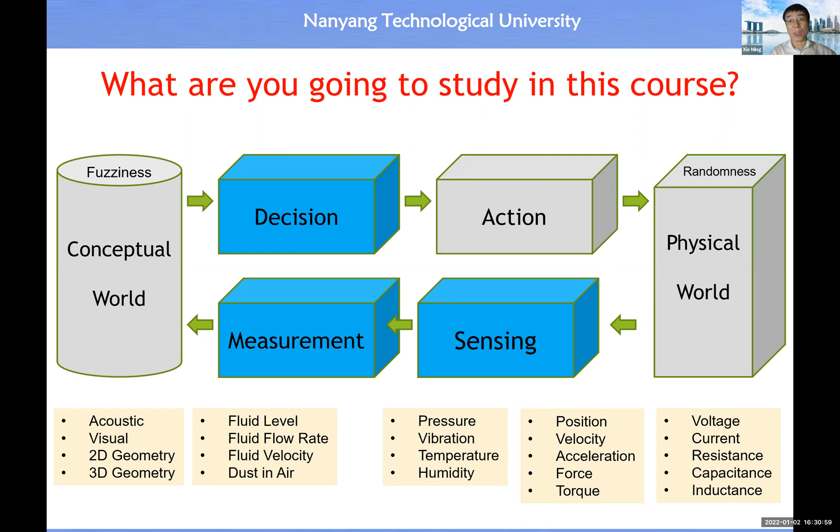In addition, this course covers the basic details about the physical world and the conceptual world. The course also covers the basic knowledge for you to apply in order to cope with randomness in the physical world, and also the basic knowledge to deal with fuzziness in the conceptual world.

Then the fourth common question that you may have in mind is about how to apply knowledge learned from this course. This slide basically shows you the general guideline for the design of a sensor or sensing system. The design of a sensor and the sensing system involves 2 steps.

Step number 1 is to design the sensing element which will transform the value of the physical quantity under measurement into readable value. The second step is to calibrate the sensing and the measurement system so that the output from the sensor is exactly equal to the input value of the physical quantity under measurement.

In addition, after calibration, you should be able to assign the unit of measurement to the output, which will be exactly equal to the unit of measurement at the input of your measurement and sensing system. For the first step, you may face 2 situations.

The first situation corresponds to the case in which the use of a front-end sensing element should be good enough for you to achieve the transformation from the value of physical quantity into readable value. And in most cases, you may face the second situation in which you have to make use of a front-end sensing element plus back-end sensing element in order to transform the value of a physical quantity under measurement into readable value.

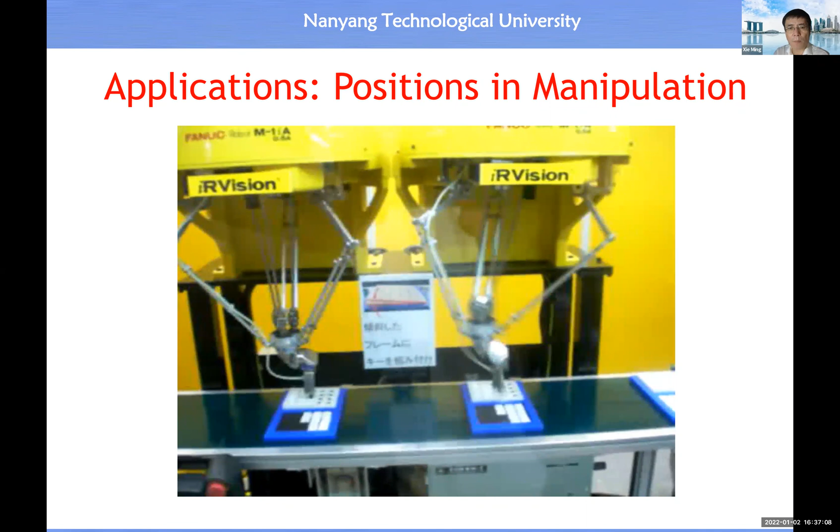And this video shows you the industrial application in the production line in which a robot will undertake autonomous pick and place. You will see for such behavior, knowledge about position is critical. And in this video, you will see again that the knowledge about position is extremely critical to implement such autonomous behavior, which could be performed by humanoid robots.

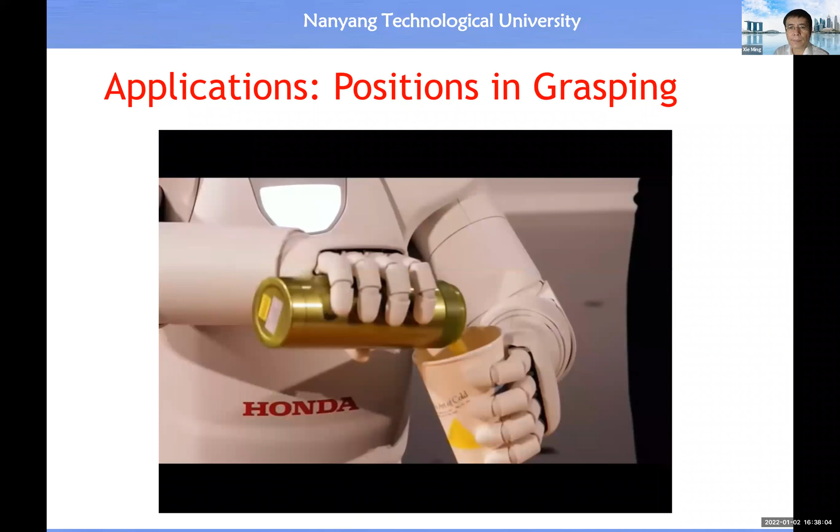In the physical world, all entities are subject to spatial constraints and time constraints. So therefore, we want to know the position and also the time associated with all the physical entities in the physical world. So space and time are the background knowledge about the existence of any entity in the physical world.

In order to tell the value of a spatial property, we need to have a reference. In other words, in order to tell the position, we must provide the reference. For example, distance means what? Distance means a relative position with respect to a reference point. So we can talk about distance between 2 points, or distance of 1 point with respect to another point. So therefore, we need to have a reference.

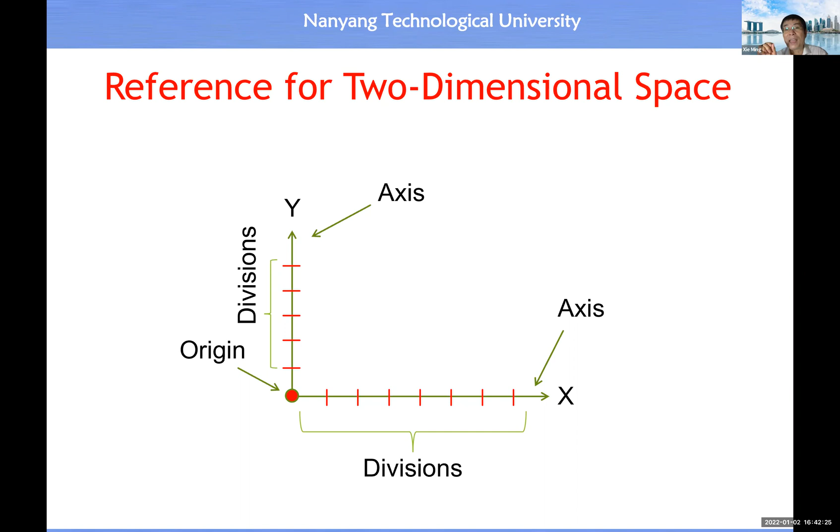If we want to study the position or motion in a planar surface or two-dimensional space, then we need two references in two different directions, one in the horizontal direction, another in the vertical direction. Each reference corresponds to one axis. Then we can make the origins of these two axes superimposed together, just to simplify the notation.

Then in the case of study in three-dimensional space, we need three references, and each reference will have one axis, so we will have three axes. Then we can make the three origins of these three axes superimposed at a common point. So this is why we have a common origin. However, the directions of these three axes are orthogonal. Then each axis has its division and scale.

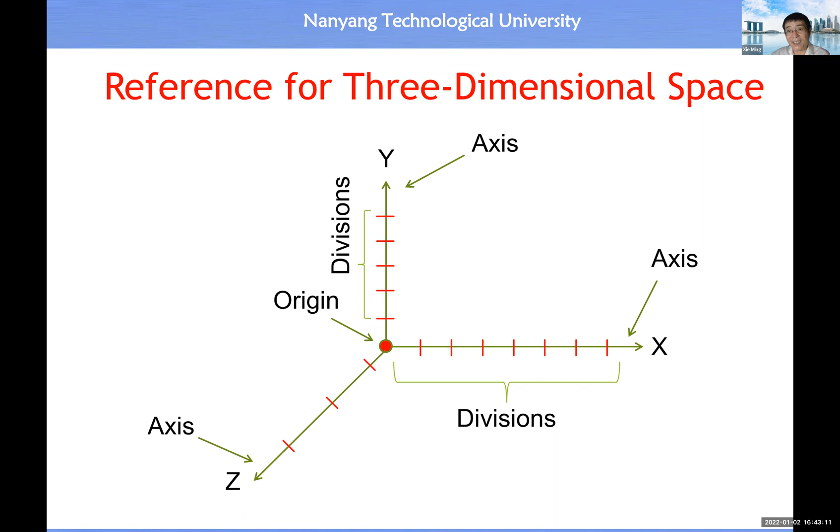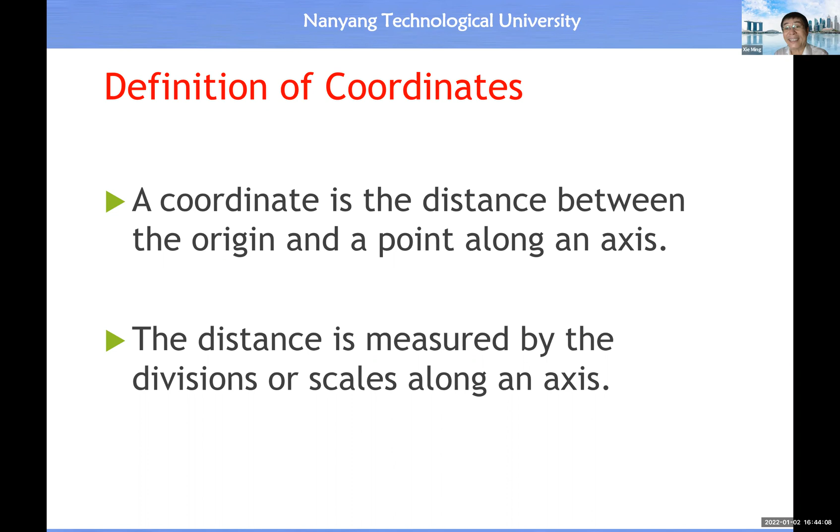Then with each reference, or each axis, we can tell the position. The position basically means the distance between the origin and the point of the object on the reference. This distance is called a coordinate. In technical terms, a coordinate is the distance between the origin and the point along an axis. This point could be the projection of any physical entity onto the axis of a reference. The distance has a unit of measurement, indicated by the unit of the scale or division. So this is the detail about the reference for space and reference for time.

Then in two-dimensional space, we have two axes and their origins are superimposed together. In this case, we must have two distances: distance to origin along the horizontal axis and distance to origin along the vertical axis. These two distances are called the x coordinate and the y coordinate. For example, the distance from A to origin along the x-axis is 1, 2, 3. Distance from A to origin along the y-axis is 1, 2. So the coordinate of point A is (3, 2) meter.

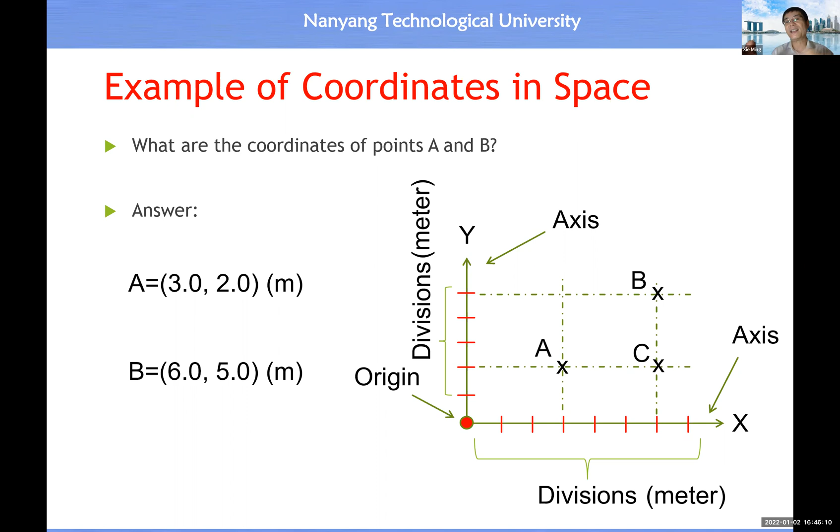Then what should be the coordinate for point B? Distance from B to origin along the x-axis is 1, 2, 3, 4, 5, 6. Distance from origin to point B along the vertical axis is 1, 2, 3, 4, 5. Therefore, the coordinate of point B is (6, 5) meter. So this is a way for us to describe the detail of a location. If we follow this background knowledge, everyone will understand our description of a position.

Besides the XYZ coordinate, we may also use the polar coordinate. The polar coordinate is suitable for describing the output from radar or laser rangefinder, because the laser rangefinder just scans in the horizontal plane. At every angular position, you measure the distance from the sensor to the target point. So the output should be the angular position plus the distance. If we put these two pieces of information together, we call them a polar coordinate.

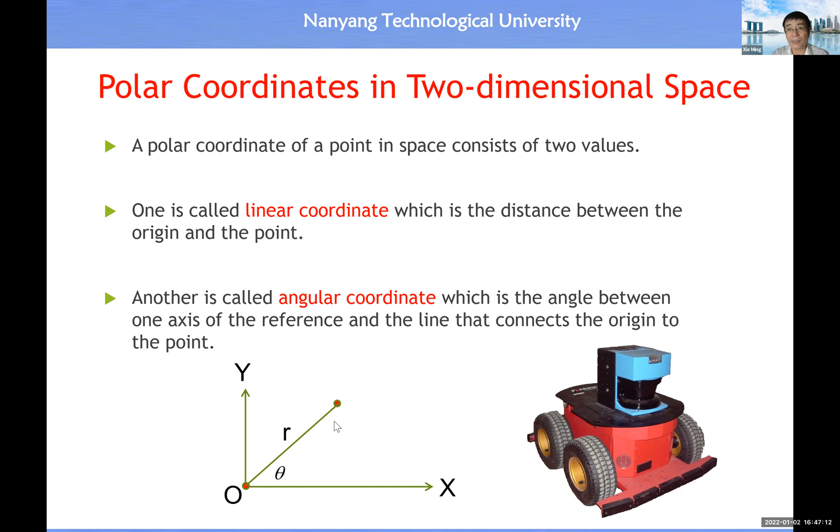So it's quite straightforward. A polar coordinate consists of a distance from the origin to the point of measurement, plus the angular position of this vector from the origin to the point of measurement. So, r theta. Mathematically, we can undertake conversion between the polar coordinate and the XY coordinate.

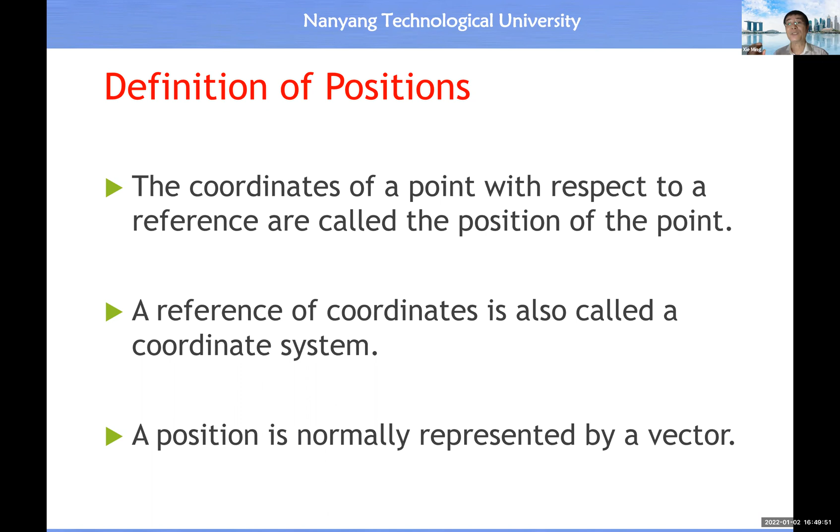For example, in three-dimensional space we have a global coordinate system. Then for each rigid body inside the physical world, we could define a position vector. There is background knowledge here: this is a convention in the study of mechanical systems. We normally assign a local coordinate system to each rigid body. Therefore, the position of the rigid body is equal to the position vector of the origin of the local coordinate system with respect to the global coordinate system.

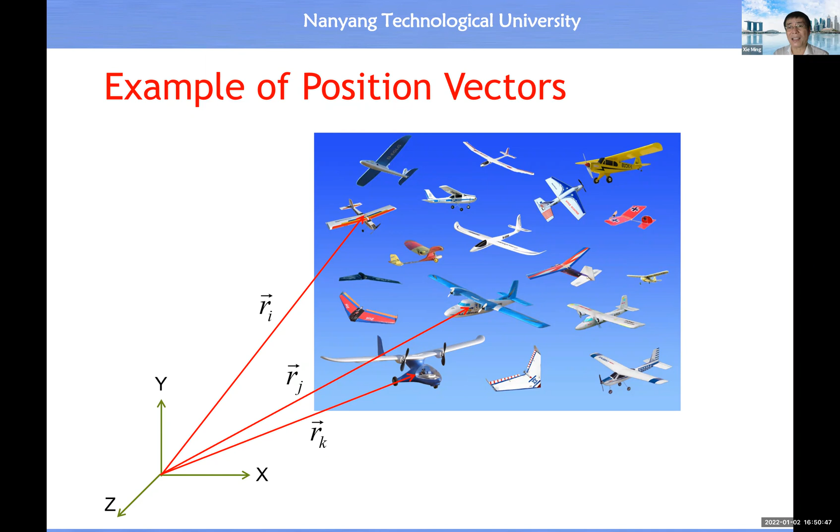Because we assign a local coordinate system to each rigid body, the origin of the local coordinate system represents the position of that rigid body. So this is a convention used in the study of mechanical systems. That's about the detail of position.

We can talk about position in the time axis, and position in the space axis. In three-dimensional space, normally we have three axes, and the position could be represented by a vector. These are the details about the position of an entity in the physical world.

Then the next question should be how to indirectly measure the position of a physical entity, or how to directly measure the position of a physical entity in the physical world. So we look at the scenario of indirect measurement. Indirect measurement means computation using knowledge about the related physical quantity. For whatever reason, if we are able to measure the related physical quantity, then how do we use this knowledge to compute position? This corresponds to the scenario of indirect measurement.

Based on our knowledge of physics and mathematics, we can formulate four observations. In physics, position can be calculated from knowledge of velocity, and position can also be calculated from knowledge of acceleration. In year one physics, we studied this relationship among position, velocity, and acceleration. In mathematics, we know we should be able to determine the position of a point in a two-dimensional space if we know the distance from this point to a few reference points, and similarly in three-dimensional space, we can determine position from relative distances to reference points. So these are the two scenarios for us to use to calculate position. Now I'm going to show you the detail for each of these four scenarios.

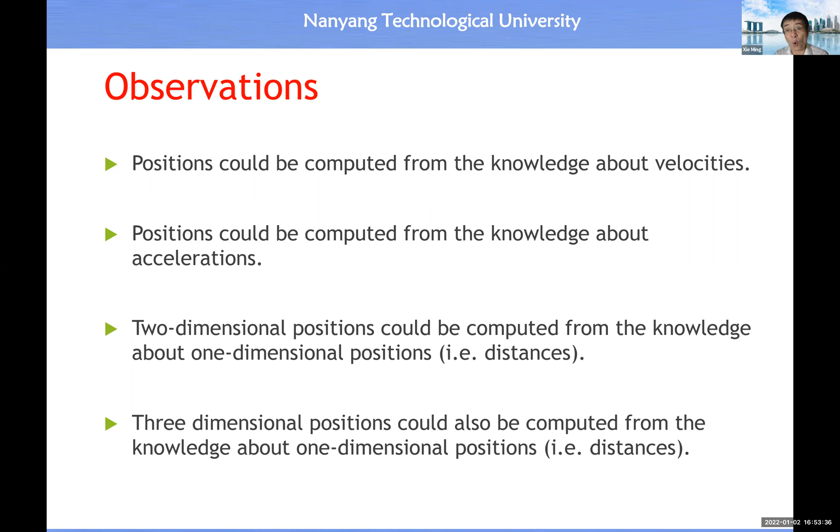Let's consider this special case of velocity. For example, we know the velocity of a moving object or moving signal is constant. How do we leverage this knowledge to calculate position information? In the first case, if an object moves along the x-axis with a constant velocity, what should be the time function for us to use to calculate its position at any point in time? The answer is straightforward: x(t) equals initial position plus the increment of position due to constant velocity, so it's v times t. This is a very simple equation. Once we know v, we can calculate position at any point in time.

Now we'll pay attention to this particular situation: we know the velocity of a signal. For example, light - the speed of light is constant, and electromagnetic waves are light, so the speed of electromagnetic wave is constant. How do we leverage this knowledge? The answer is to leverage this property to come out with a solution, so that we can indirectly compute or measure the position of a moving object. Later on I'll show you the detail. This is the first scenario, which corresponds to the case in which velocity is constant. We can explore this special case to design a different type of product, making use of this property of a signal traveling at constant velocity.

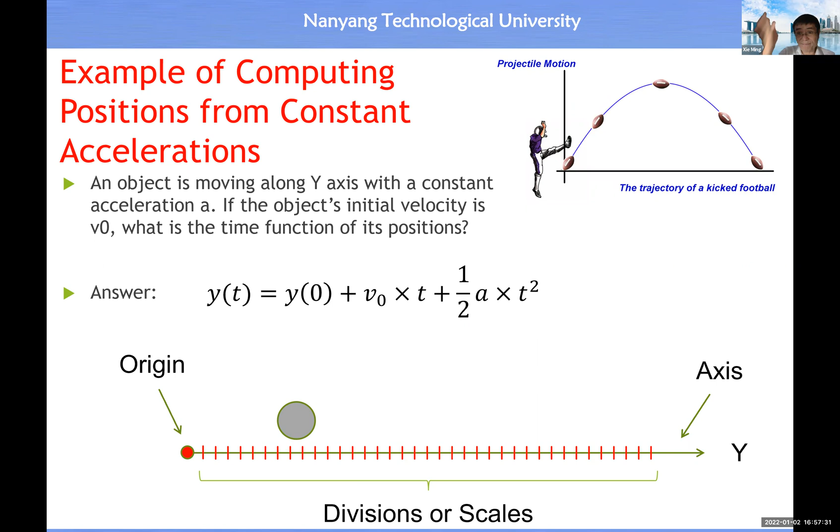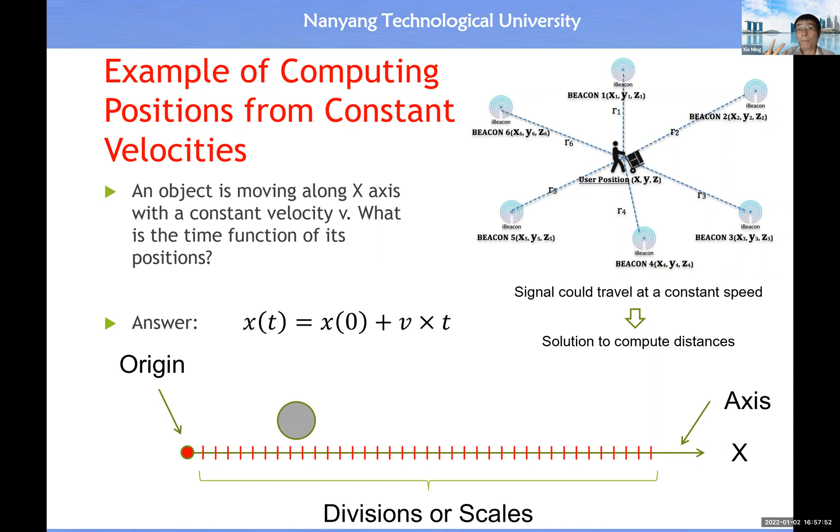Now to this question: how do we explore the use of a signal's constant velocity to come up with a product or system for the measurement, or indirect measurement, of position? The answer should be similar to this question: how to determine position from distance? Because we're able to determine distance from the constant velocity of a signal. Later on I'll show you how to determine distance from a signal's constant velocity. First, let's look at the answer to this question: how to determine position from distance.

In case we only know one distance from a physical entity to a reference point, then in this case we only know that this physical entity should be at any location on the surface of a sphere centered at the reference point.

The reference point basically means an emitter of a time signal. So let's say we have an emitter of a time signal, then the object or any physical entity will carry a receiver of a time signal. Once it receives this signal, we calculate the sending time and the receiving time, then delta t times speed of light gives us this distance.

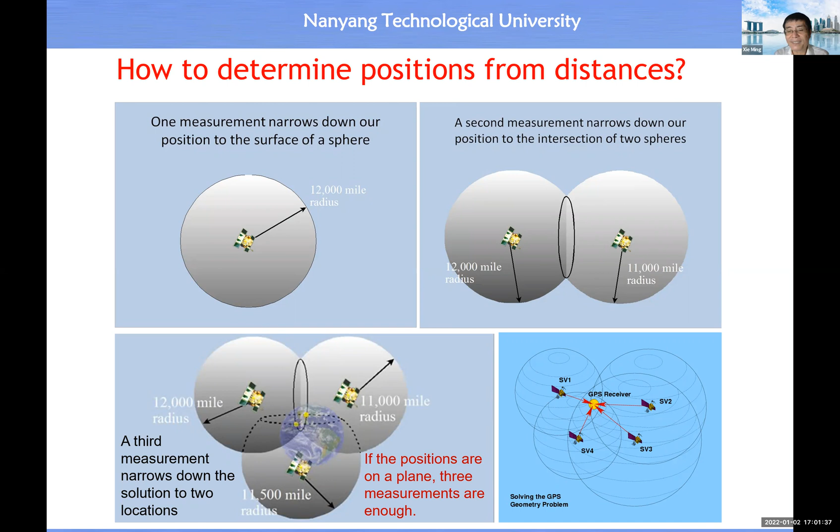Then the next question you may ask is how to determine distance. The answer is to use a time signal emitter and receiver. For example, we have a receiver which will be carried by a robot, a smart vehicle, a person, whatever, or by any target. And we have an emitter at a known position, meaning the position of this emitter is known in advance.

We let the emitter send the time information to the receiver, because this electromagnetic wave can be encoded with a 0101 binary number. So inside the binary number, we can write in the XYZ coordinate value plus sending time. Here we assume all the emitters and receivers have the same clock, a very, very precise clock, which we call an atomic clock. So very, very precise.

Once the receiver receives the signal, you can detect what the receiving time is. Then delta t should be equal to receiving time minus sending time. Once we know the time difference, this time difference times the speed of light gives us the distance between one pair of receiver and emitter.

In this scenario, we have 3 pairs of receiver and emitter, because this receiver could form 3 pairs with these 3 emitters. So let's answer this question of how to determine distance between 2 locations.

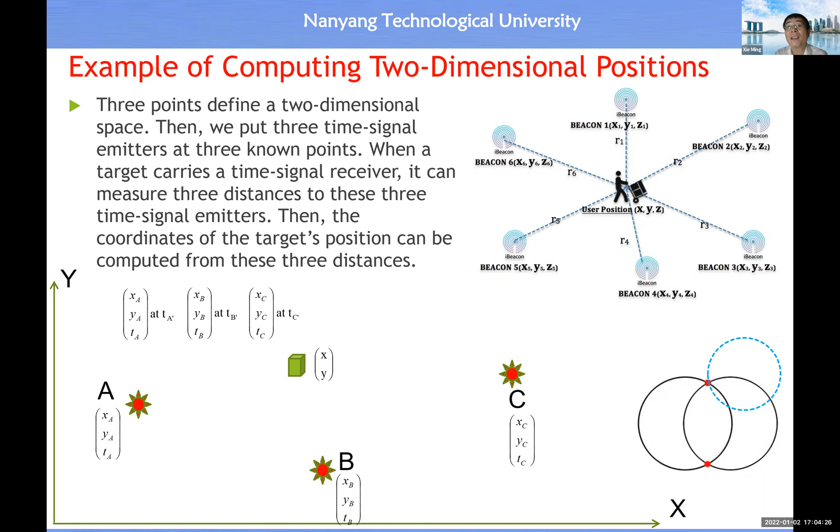Then the receiver will receive this information plus the receiving time, because inside the receiver there's also an atomic clock, and they are running at the same time. Therefore, we will know what the receiving time is, and then we will know what the distance is. With this distance, it should be good enough for us to come up with the solution for the calculation of a position. Now here we have the detail of the equation.

Okay, for example, we should be able to write down the equation of a circle centered at the point A, the equation of a circle centered at the point B, the equation of a circle centered at the point C, and the radius for the circle at the point A should be equal to velocity times delta t, and the radius of the circle at the point B should be equal to velocity times delta t.

All right. So in this case, delta t is equal to tB prime minus tB. So this one is the receiving time. This is the sending time. Right. Similarly, for the circle centered at the point C, we could write down this equation. Right. Then we expand these three equations.

Then we let the first equation be minus the second equation. In this way, we will cancel out the x squared, y squared. Okay, and then we obtain this equation. Similarly, we let the first equation be minus the third equation. In this way, we cancel out the x squared, y squared. Then we have this second equation here.

Now we can put these two equations together into a matrix equation. Then we compute the inverse of the matrix. Then in this way, we will obtain the solution for us to calculate x, y, right? And here, A is a coefficient matrix with all the coefficients in front of x and y. B is a coefficient vector, okay? So B contains this value and this value, all right? So this is a quite straightforward solution, all right?

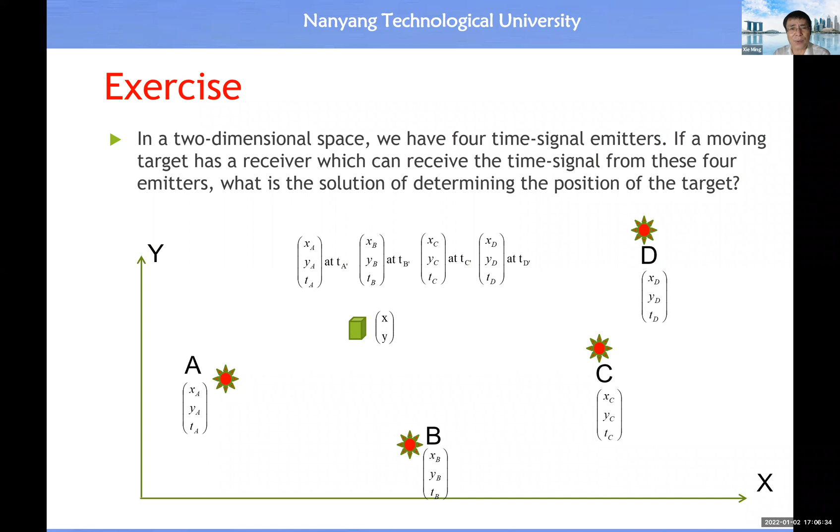Then this exercise is for you to think about or to do at home. The question is, what happens if we have more than 3 emitters? Then what should be the solution? All right, so you try to come up with the solution for this scenario. All right, and this video is showing you an implementation of this solution by a company.

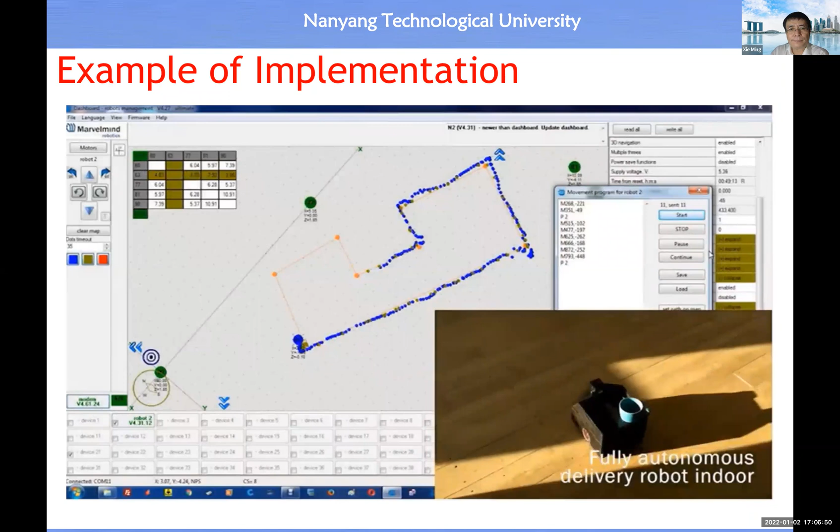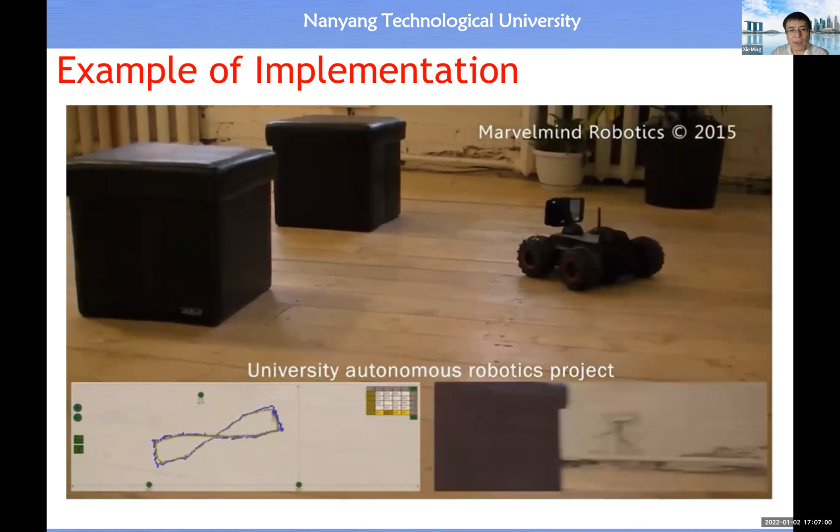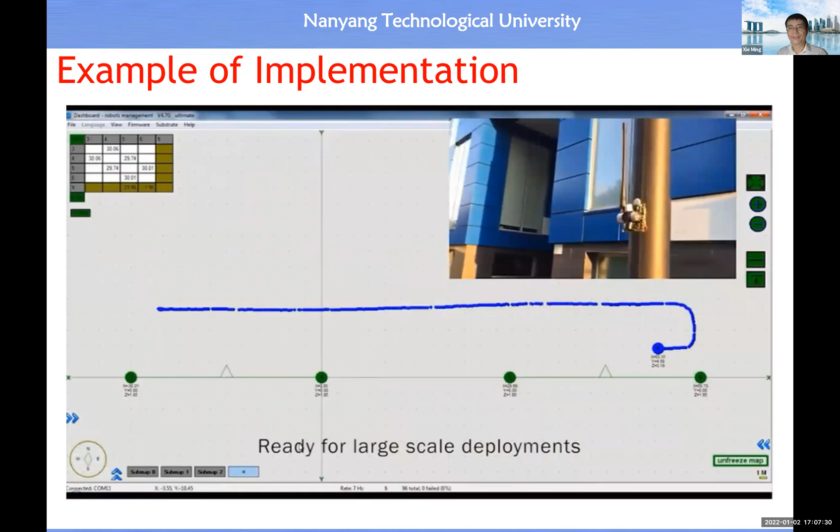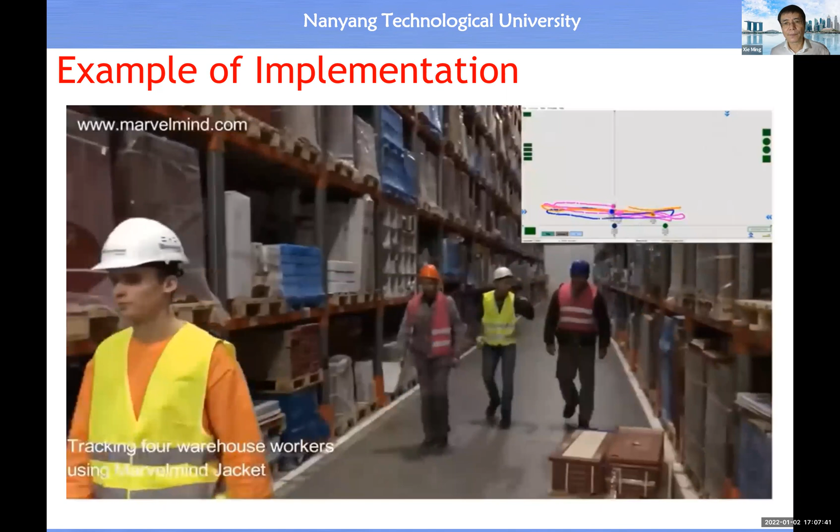You see, we can compute the location in a 2D space, okay, in real time. And in this case, we only consider the XY coordinate of the geometry. Okay, we ignore the height of the geometry. So you see the accuracy is quite accurate, right? In this case, also we are in a 3-dimensional space, but we only care about the XY coordinate.

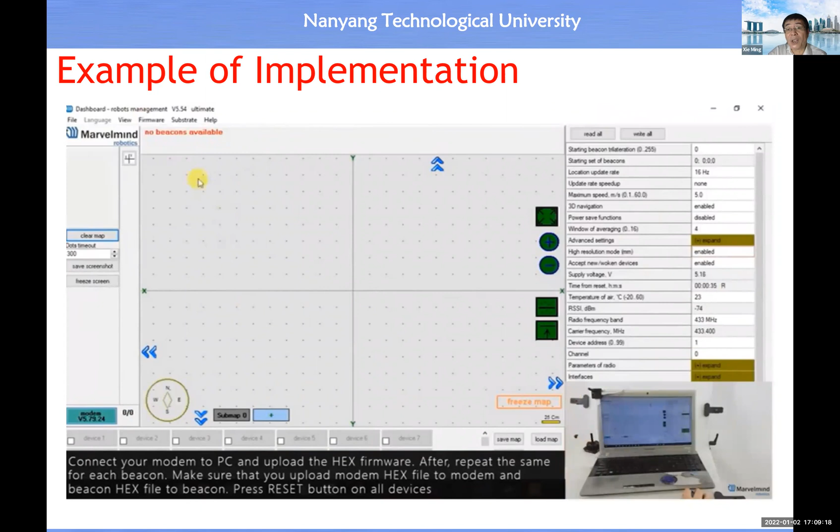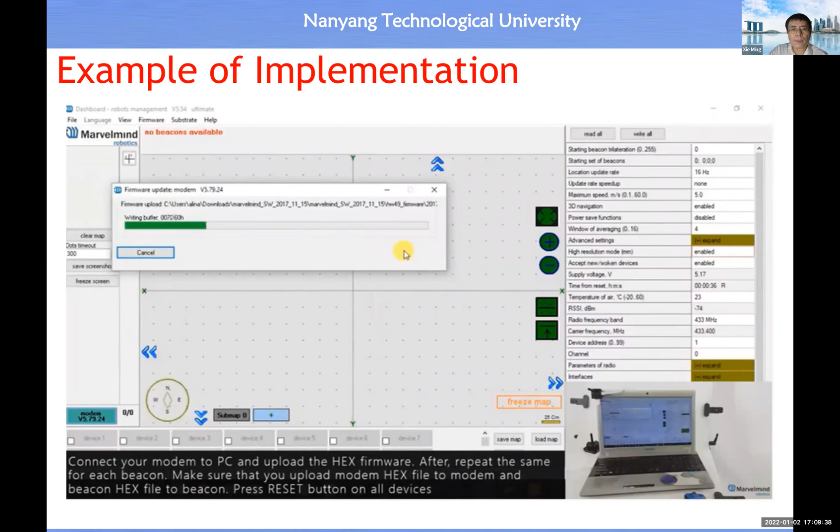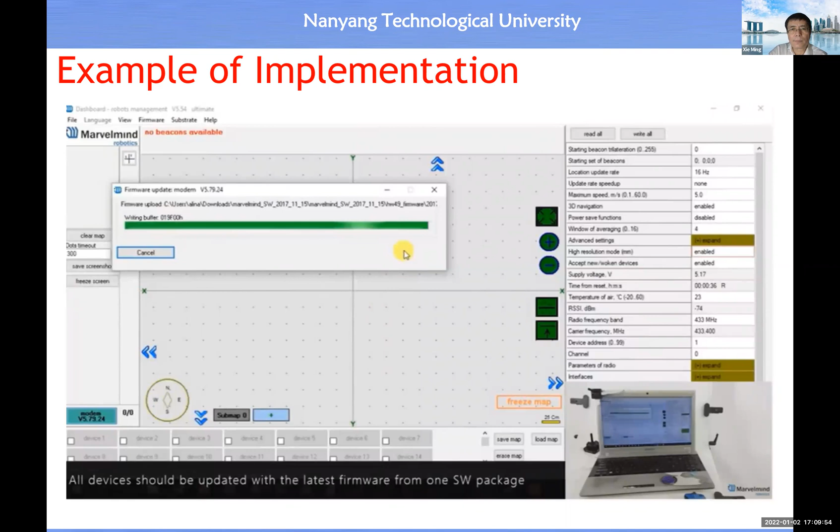So you will see the procedure about how to install the software, how to do the setup. Then you see, okay, they place the emitter at the fixed location, or at the location in which the XY coordinates are known in advance.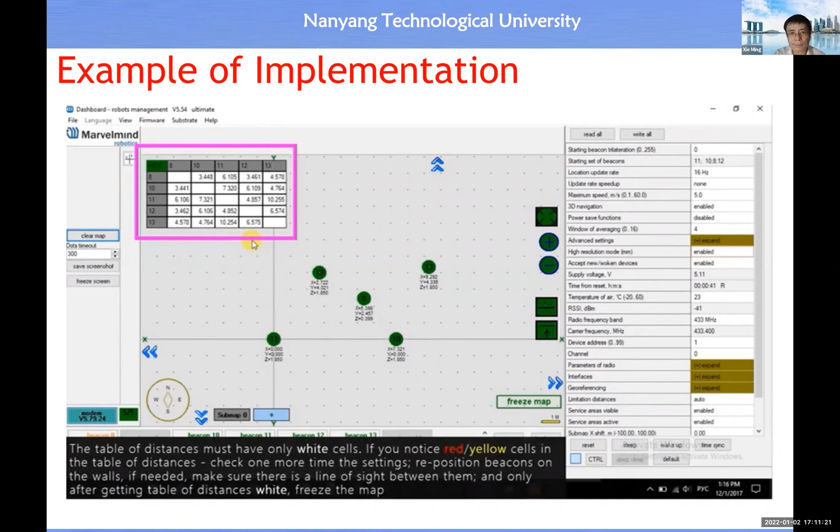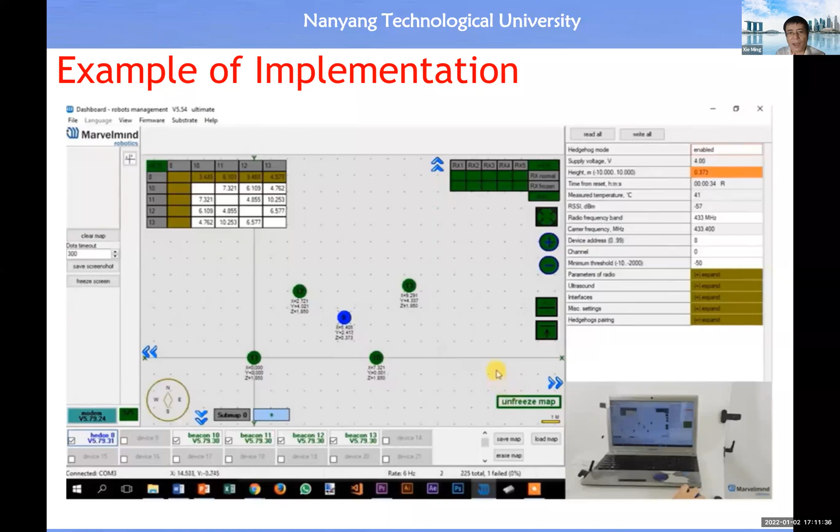Since the XY coordinates of these four emitters are known in advance, therefore we can visualize their location, all right? The fifth one should be the receiver, okay, on the target, a moving target, right? The blue color one should be the receiver, okay, which is placed on the moving target. So this is the one, right?

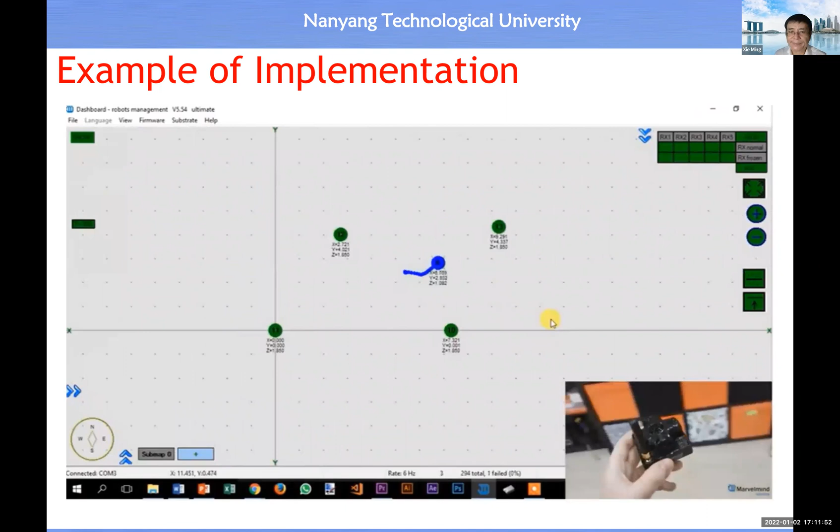So you see, when we move this receiver, the XY coordinate of this receiver could be calculated in real time, very, very precisely. All right, so you see this principle which has been implemented, okay, with a real product.

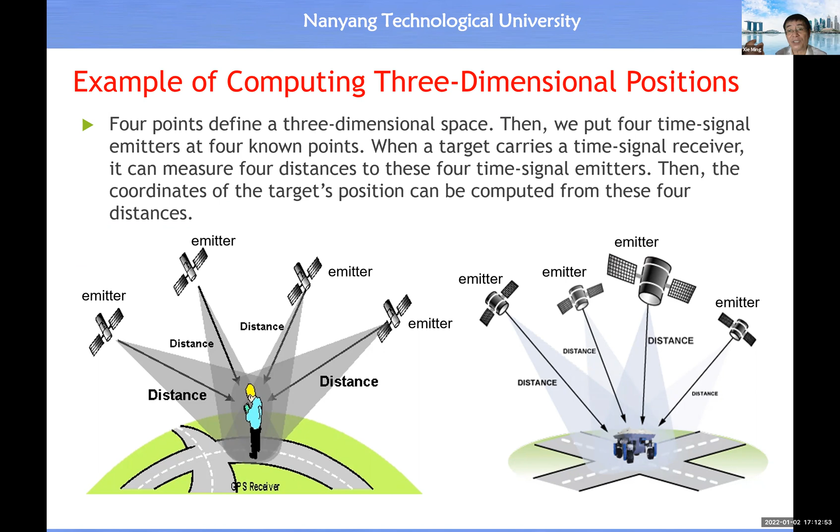All right, so now we move on to consider the situation in which we would like to know the XYZ coordinate instead of the XY coordinate. All right, then in this case, instead of having 3 emitters, we need to have 4 emitters. All right, so this is a scenario corresponding to the GPS inside your smartphone or GPS inside your smart vehicle, etc. Right? Then what should be the equation behind the calculation of making use of GPS in order to determine the XYZ coordinate of a moving target?

All right. So then the equations should come from the 4 equations of 4 spheres, because we have 4 emitters. Okay, so emitter 1, emitter 2, emitter 3, emitter 4. Each emitter has their own precise XYZ coordinate, and each emitter, okay, will send out the time signal with the sending time. Then the receiver will receive this signal. Then the receiver should be able to calculate the delta t. Then delta t times the speed of light should be the distance from the receiver to this emitter.

Therefore, centered at this emitter, we should be able to write down the equation of a sphere. Then this is the equation of the first sphere, equation of the second sphere, equation of the third sphere, equation of the fourth sphere, right?

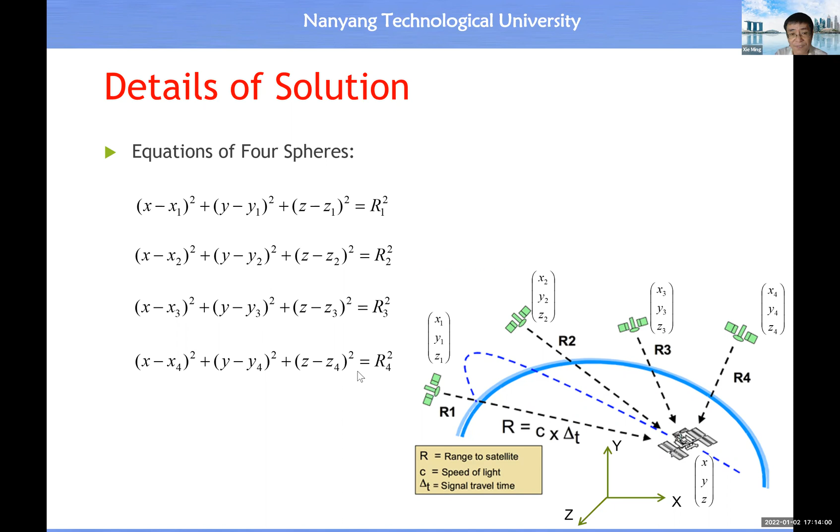Then from these 4 equations of a sphere, we let the first equation be minus the second equation. Then we should be able to remove the terms, okay, of x squared, y squared, z squared. Then we have this linear equation for x, y, z. Then we let the first equation be minus the third equation. Then we have the second equation.

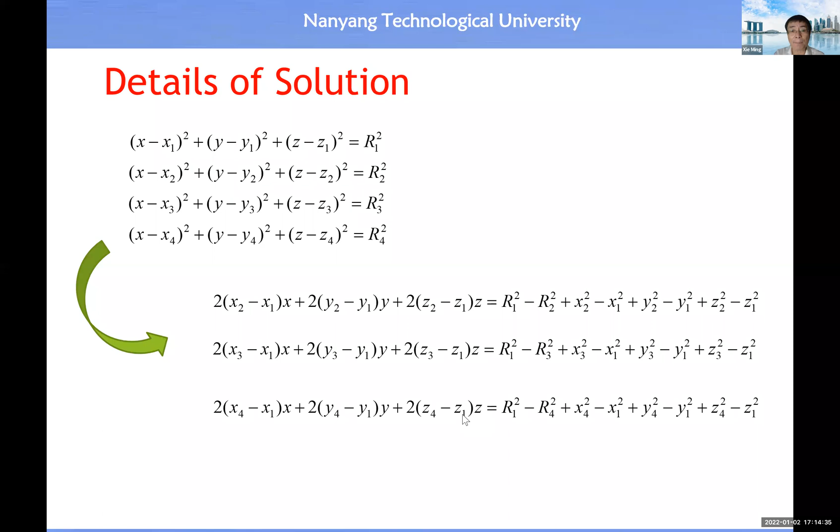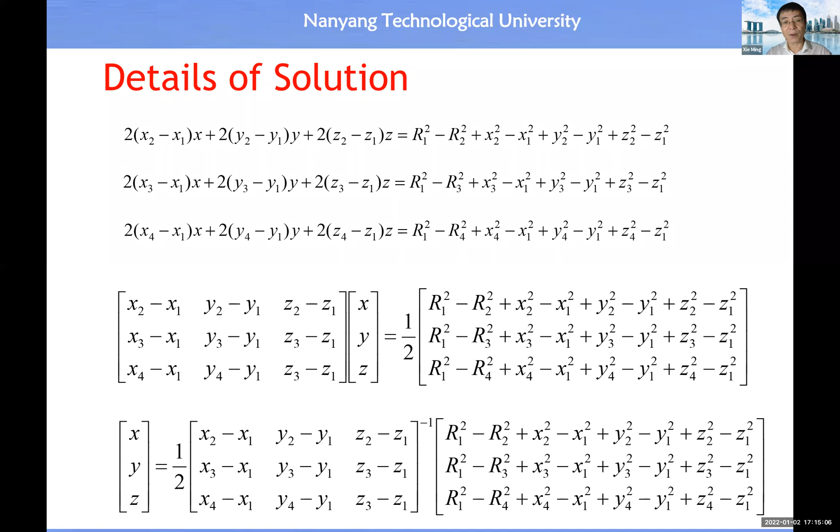And this is a square matrix. Then we can compute the inverse of this square matrix. Then immediately we have a formula for us to calculate x, y, z. All right, so it's quite straightforward. And this is an exercise for you to do at home.

Okay, what happens if, let's say, we have a receiver which could receive signals from more than 4 emitters? Normally it's true, inside our smart handphone, our GPS receiver could receive 12 signals, etc. Then in this case, what should be the solution for us to calculate X, Y, Z?

So that's about the basics of indirectly determining the position in the 1-dimensional space, 2-dimensional space, and the 3-dimensional space. But our focus here is on direct measurement of the position. Then you may want to know what should be the physical principle for us to follow in order to guide the design of our own measurement and sensing system for position.

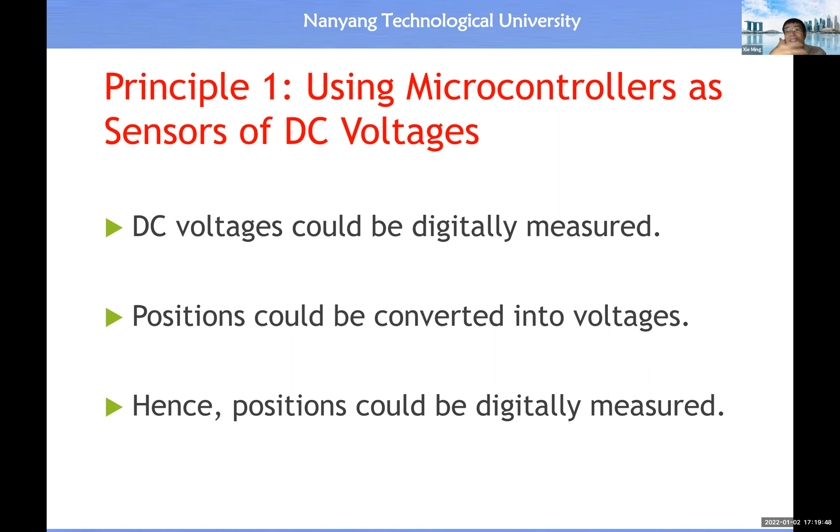So now I'm going to show you the example which will make use of design principle 1 and design principle 2. By following the example, you should be able to come out with your own solution. So principle number 1 is to consider the microcontroller as a sensor of DC voltage. Then in this case, you just need to know how to transform position into voltage. If you are able to do that, then you have a solution already.

Then the design solution should be this one, because inside the microcontroller, we have modules such as a voltage synthesizer, analog comparator, digital counter, digital display. And the working principle you know: we predict the digital value for voltage, use the predicted value to synthesize DC voltage, and use the synthesized DC voltage to do comparison with the input voltage.

When the values match, then we will stop the counting. Then the actual value inside the counter should be the digital value which corresponds to the analog input here. Then the whole problem becomes how to transform the value of a physical quantity under measurement into DC voltage. In this case, how to do position-to-voltage conversion.

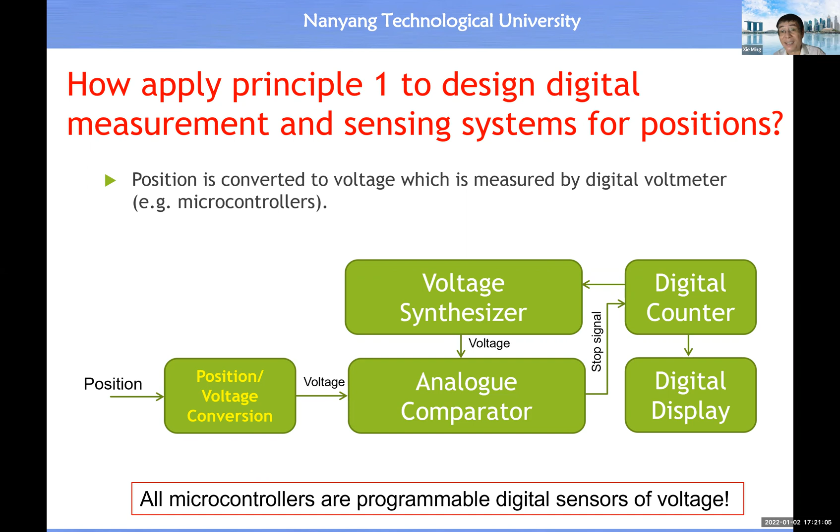If you have an answer, then you have an answer to this question of how to apply principle 1 to design a digital measurement and sensing system for position. So actually, there are many ways for us to do the conversion from position to DC voltage. For example, this is also a popular solution. We call this sensor an infrared distance sensor.

So we have an infrared emitter, LED, then we have a light detector, which is called a phototransistor or photodiode. The light will propagate in the space, hit the target, then reflect back. The amount of energy received by the phototransistor will be reflected by the voltage as output here, because the light will transmit out, bounce back, and hit the phototransistor. Then this one will produce a response in terms of DC voltage as output, and this is proportional to the amount of energy received by the gate pin here.

So if more energy is received here, you will have more current which will flow through here. Then the voltage will drop. And then the input-output relationship will look like this. This is the output voltage, and this is the distance to the reflective object. You have an infrared transmitter and the photodiode to detect the reflected energy. When the distance increases, the amount of energy will reduce.

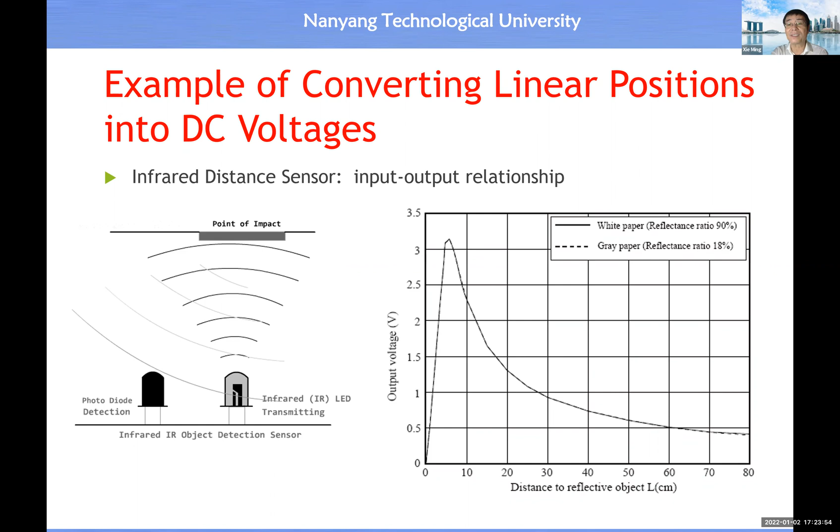By doing calibration, we can easily ignore this measurement range. Or you can implement a decision rule to know whether the value corresponds to sensing in this short range or in this long range. Because in this way, you can also detect the presence of an object which is very, very close to the sensor. So it's up to you. This is the typical response from an infrared sensor.

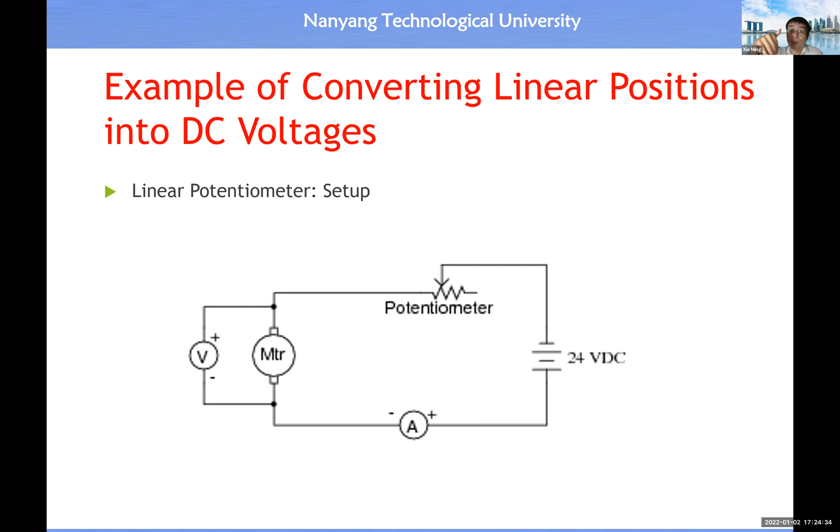And the second solution is to use a variable resistor. A variable resistor has a wiper. We use the wiper to couple with linear position. For example, if an object undergoes linear motion, you can couple this linear position with the linear position of the wiper. In this case, we can convert variation of position to variation of resistance. Then we apply a voltage to the R circuit, and variation of resistance will become variation of DC voltage.

The equation is here. This one is coupled to the linear motion of a target object. This motion will produce a variable resistance at the output. This variable resistance will produce a corresponding output voltage, because the current is equal to V input divided by the total resistance. Then this current times this variable resistance is equal to the output voltage.

And this ratio is actually equal to the ratio between this distance and the total length of the resistor. This is the total length of the resistor, and this is the variable length of the resistor. So you have this relationship. This is for linear motion.

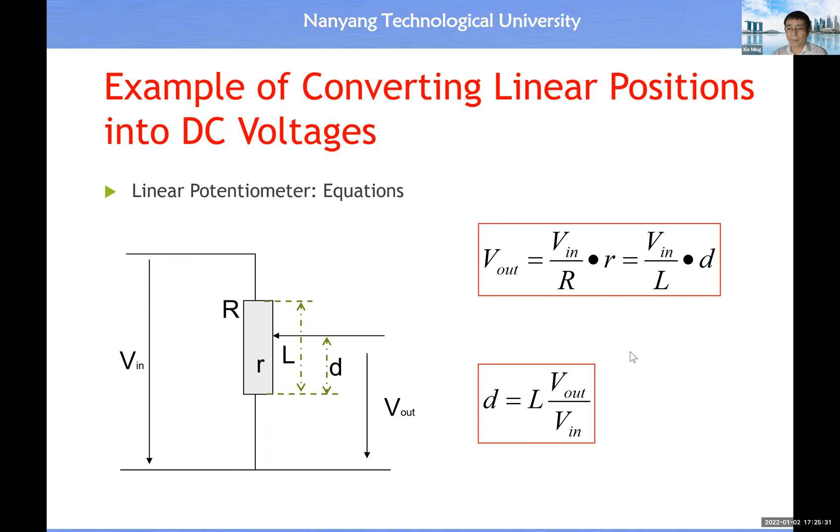Then how about rotary motion? We also have a rotary potentiometer, and the typical application is shown here. For example, when you design a human-sized robotic hand, there are many degrees of freedom inside. Therefore, you cannot afford to use a big sensor to measure position. Then we may have this small-sized potentiometer.

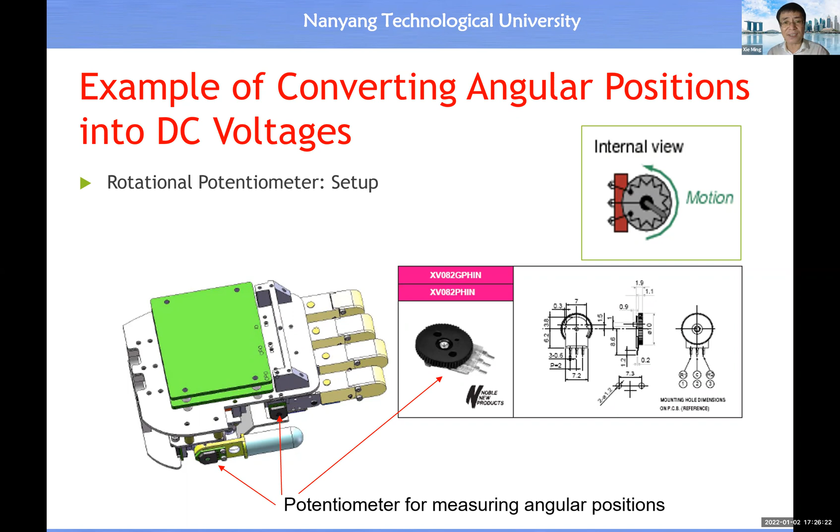Inside here, you will see there's a wiper. The wiper will undergo rotary motion. You have two pins as an input. Let's say this is a common ground, this is the input voltage, and this will be the output voltage. So this is a very simple device. The mathematics will look like this.

In this case, similarly, the current which flows inside the resistor is equal to input voltage divided by the total resistance. Then output should be equal to the current times the variable resistance r. That means the ratio between this one and this one should be equal to the ratio between the angular position of the wiper divided by the total angular position of this circular resistor.

By default, we assume this circular resistor covers 360 degrees, then we use 2 pi. If this one is smaller than 2 pi, then you use another value. But anyway, it does not matter because we have a calibration. Here we see an error because this is a systematic error. It's always fixed. So it does not matter because through the calibration, we can cover this error, or eliminate this error.

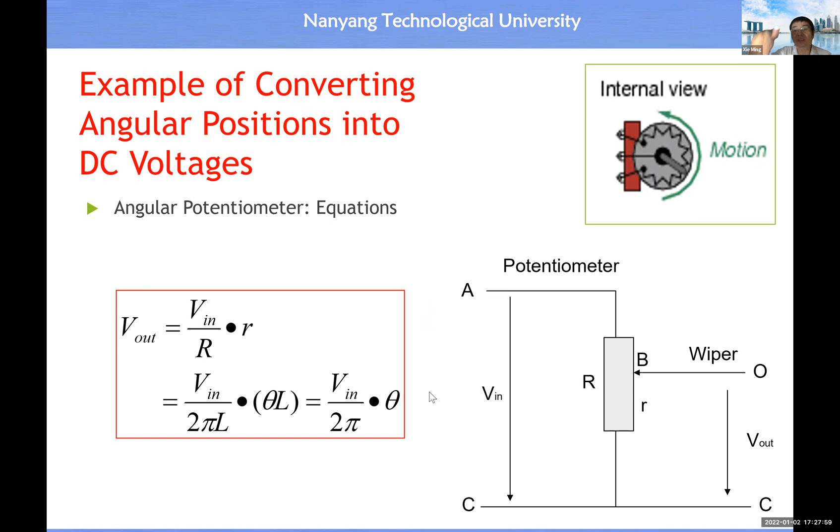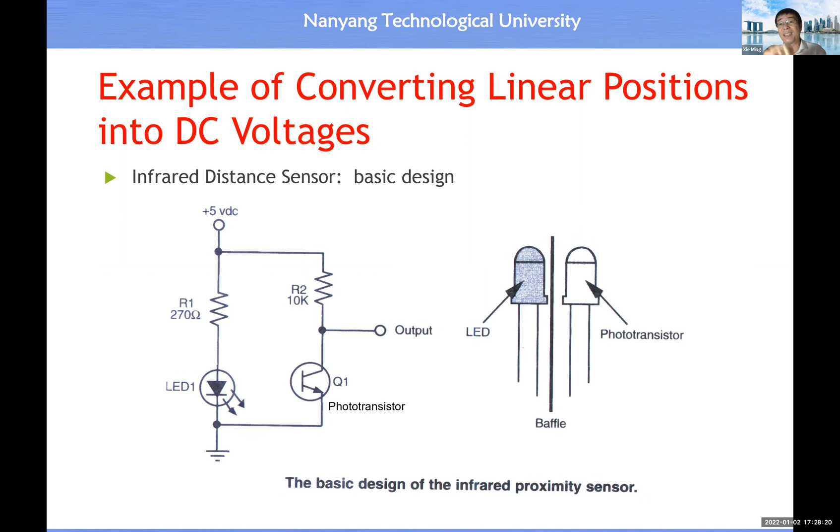So you can use this ideal value for the entire range of this circular resistor. So theta divided by 2 pi basically will give you the relative resistance as output. Then output voltage is a function of angular position of the wiper. So this is an equation for you to use. So by using principle 1, it's quite straightforward for you to come out with the solution for the module which will transform position into DC voltage.

Then how to apply the second principle? Let's say we want to use a microcontroller as a sensor of a digital signal. Then in this case, we need to convert position into a digital signal, either time series. Later on we'll show you an example. That means the position corresponds to the number of pulses, in series or parallel bit. So in this case, it corresponds to the spatial pulse.

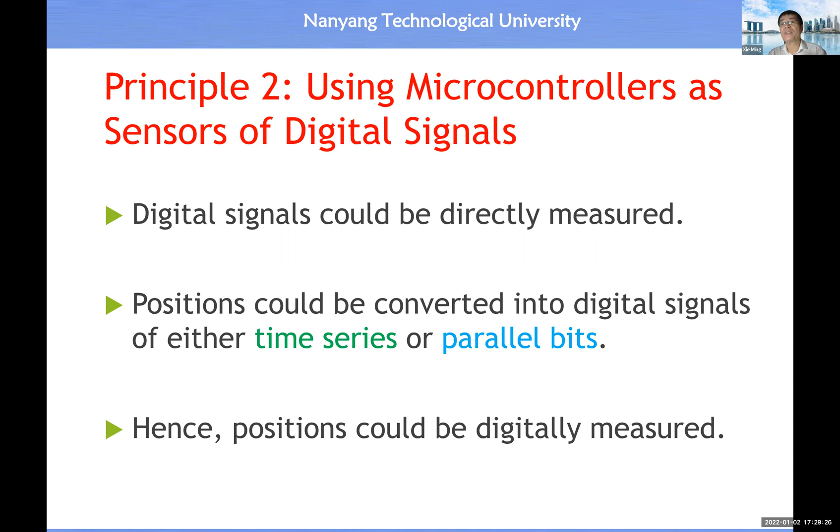That means B1, B2, B3, B4, Bn. So that is a spatial pulse. So this is a time series of pulses, and this is a spatial pulse. Anyway, these are digital signals. So in this case, we can leverage the use of a microcontroller to help us come out with the solution for the design of the measurement and sensing system for position. Then how to apply principle 2 to design a digital measurement and sensing system for position?

And inside the microcontroller, there are programmable timers. That means the frequency could be changed, and the counting value, like count up, count down, and the maximum counting value could be changed, could be set by the programmer. So it means the timer is programmable. And of course, we have a digital display device which could be attached to the microcontroller.

And here you will see the microcontroller could undertake serial counting, pulse by pulse, or parallel counting. That means if you have an 8-bit or 16-bit or 32-bit spatial pulse at the input, then in a single cycle the microcontroller should be able to read the value. So therefore, now our focus should be on the conversion of a position into digital pulses. If we have a solution to convert the value of a position into digital pulses, either time series pulses or parallel bits, it should be good enough.

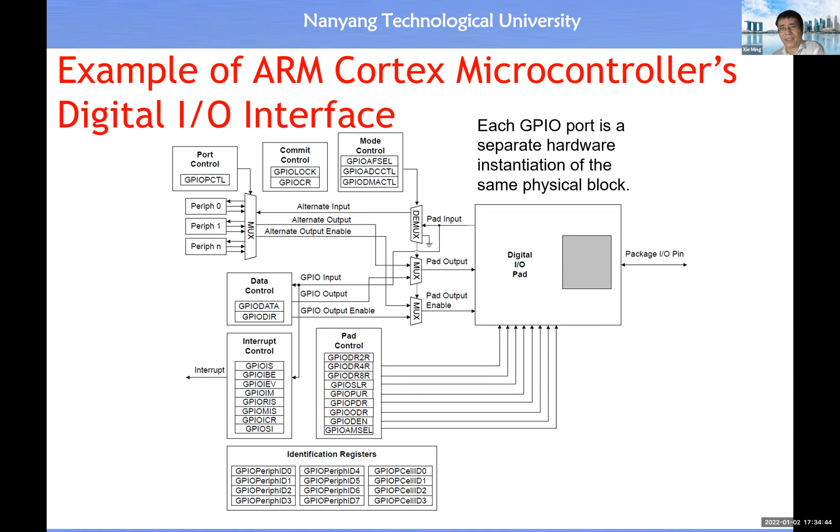So then you see you have a lot of controllers. You use the registers and you can control them, and eventually you can trigger the action by external signal, etc. So this basically helps you understand that the microcontroller is a very sophisticated device, a very, very powerful device.

Now we focus on this question of how to convert position into digital pulse. Do we have a solution? The answer is yes. For example, we use an ultrasonic waveform to do the measurement. We have an emitter, transmitter, and receiver. The transmitter transmits the ultrasonic waveform. When this waveform hits the target, it bounces back. Then the receiver will detect the echo of the ultrasonic waveform, therefore immediately you know.

So we need to detect the starting time of the transmission and the stop time after the reception, right? After the receive, what should be the stop time? Because the hardware, the electronic circuit, will output this information, and also receive a control signal about the start of the measurement. All right, so a more detailed solution is here.

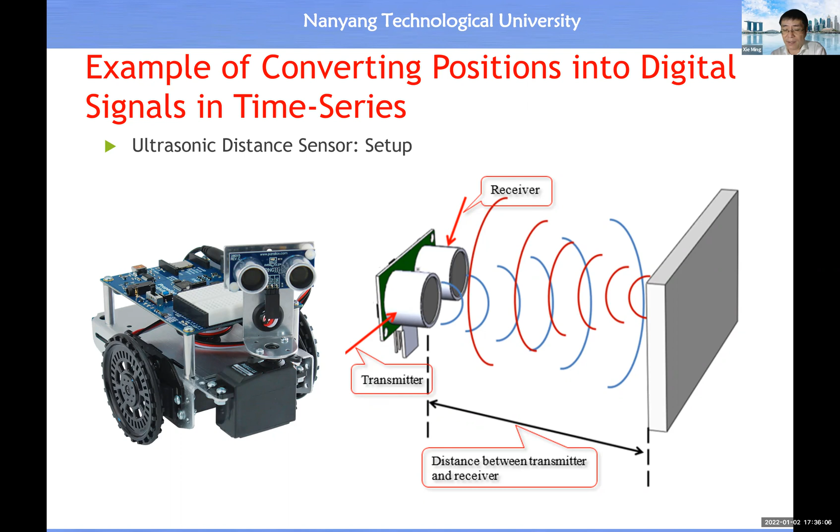You see the interface between the microcontroller and this ultrasonic sensor is like this. The microcontroller will issue a start pulse, telling it to start the measurement. Then this one will return a digital pulse, a square pulse, which has two important events, or active signals: one is a rising edge, another is a falling edge. We look at the time direction in this way.

So T1, T2. T1 corresponds to the rising edge, which tells the microcontroller to start the counting. Then the falling edge tells the microcontroller to stop the counting. So rising edge at T1 to start the counting, falling edge at T2 to stop the counting. Then based on the counting value, we should be able to calculate the value of T2 minus T1.

Then for the ultrasonic wave, because this is a mechanical wave, in air at normal temperature, more or less we know its speed is 340 meters per second. Use this number. If you have other sensors which tell you temperature and humidity, you can couple the temperature sensor, humidity sensor and distance sensor together to obtain a very precise calculation. If we just want a rough indication of distance, we just use this number, 340 meters per second.

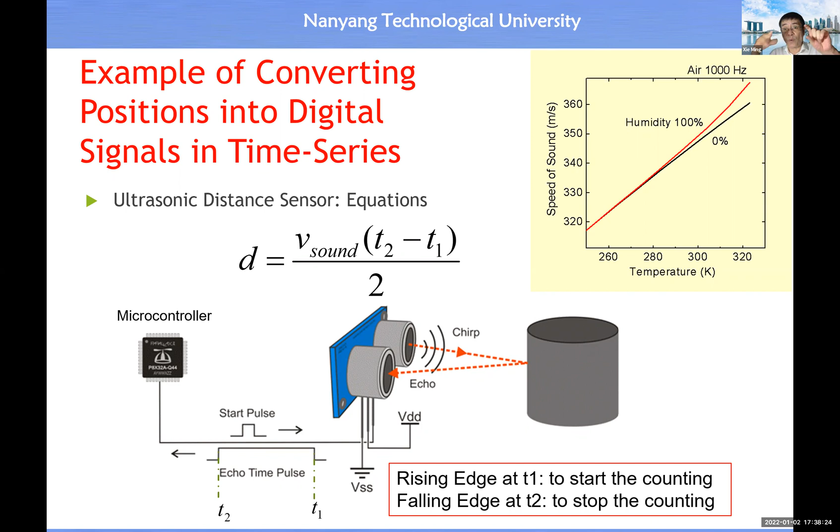Then using this formula, immediately we know the distance. Divide by 2 because the wave travels a round trip, going from the sensor to the target, then from the target back to the sensor. This is why we need to divide by 2, right? So you know the solution of producing this pulse, and this pulse defines the time window for doing the counting. That's it.

So it's very simple. Then how to convert position information into a digital signal in parallel bits instead of a series of bits? This is a common, popular solution in industry. We call it an optical absolute encoder. This video makes use of 3 bits to illustrate, but in practice we may have 10-bit, 12-bit, or 14-bit in order to have higher accuracy. For educational purposes, we just use 3 bits to help you understand how it works, but in practice we must come up with a design with 10-bit, 12-bit, or 14-bit.

Rotary absolute encoders consist of a translucent disc with a binary pattern etched on it. The pattern consists of a series of opaque and transparent slots, arranged in a concentric circular fashion. The number of slot sets is the same as the number of photocells used in the encoder.

A light source is located on one side of the disc, while photocell detectors are placed on the other side. The rotary absolute encoder shown here has 3 sets of slots and hence uses 3 photocells. As discussed earlier, with 3 photocells, an absolute encoder can detect 8 unique positions. In other words, the full shaft rotational angle of 360 degrees can be divided into 8 angular intervals of 45 degrees each that can be uniquely detected by the encoder.

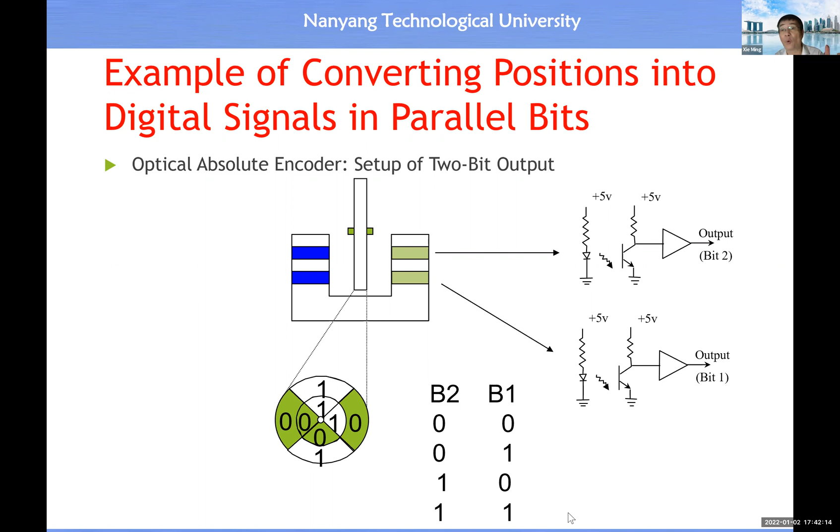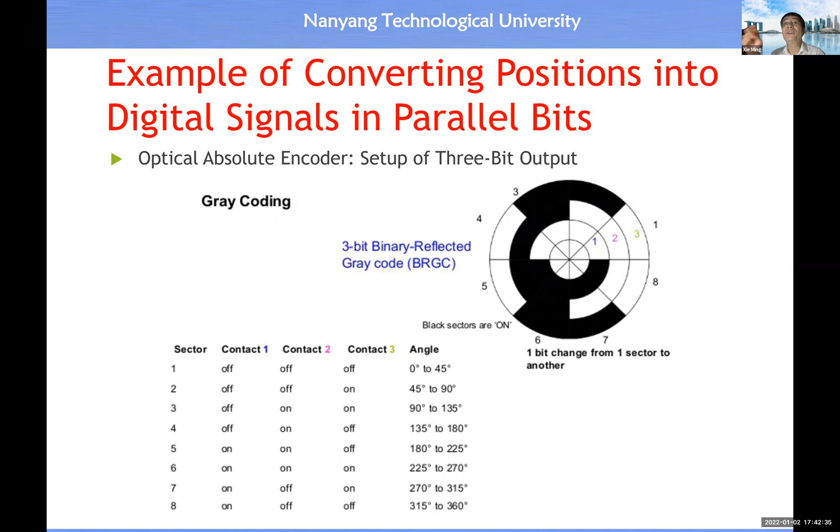And how about the 3-bit? In the video, we see the design solution which will output 3-bit data. So in this case, 3-bit corresponds to 8 positions, because 0,0,0 all the way to 1,1,1 - they are a combination.

Then how about the 4-bit? 4-bit will give us 16 positions - 0,0,0,0 through 1,1,1,1. So in total, there are 16 positions.

Then you see the internal design is like this - we have 4 photocells. By combining the output of these 4 photocells, then we have 4-bit in parallel each time. And this could be the input to the microcontroller.

A microcontroller can take in - each port can take in 8-bit. With 2 ports, it can take in 16-bit. With 4 ports, a microcontroller can take in 32-bit. So it's not a problem at all. But normally, for this type of conversion, we use 14-bit, so 2 ports is good enough - more than good enough to input 16-bit in total.

At each time, this is a solution with 8 photocells. With 8 photocells, we should be able to measure 256 positions. By combining the output from these 8 photocells, we have a spatial bit of 8-bit. For each individual cell, it will come out with its own time series, but here the focus is on the spatial pulse - it's a spatial combination of the digits, or bits.

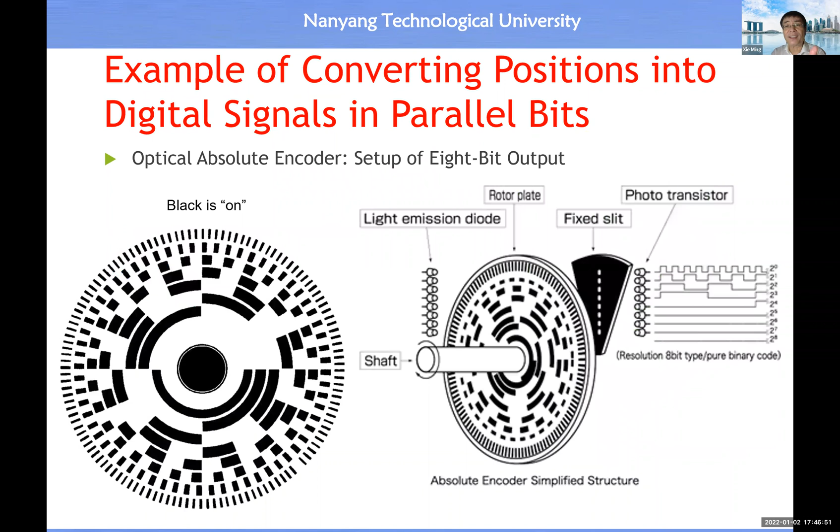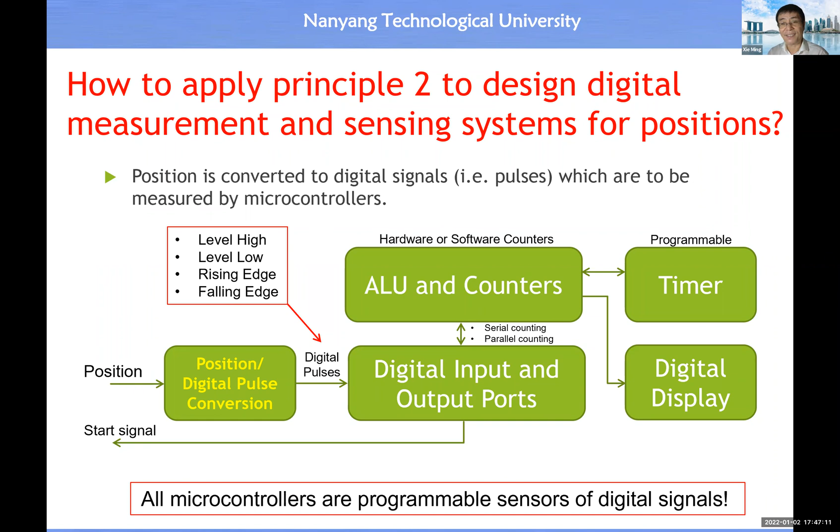That's all for the solution. So basically you have two types of solution for you to do the conversion from position into digital pulse. You have the solution, then you just follow this one, combine with the microcontroller, and you should be able to come out with your design of a sensing and measurement system for position.

Like for many other sensors, always remember to do calibration, especially when you apply the first principle to design the measurement and sensing system for position, because the first method makes use of the principle of converting position information into DC voltage, then from DC voltage into digital number. In that case, you have a YI output from microcontroller.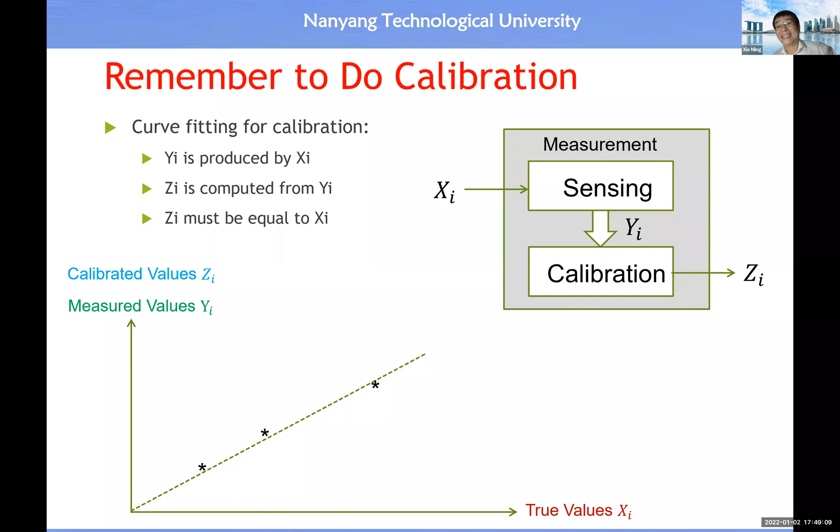Especially when you apply principle 1 to design the measurement and sensing system for position, calibration is needed. If you apply principle 2, normally you do not need to do calibration because everything is already precise. However, you can still do calibration here because in case you may make a mistake inside your program or whatever, this calibration allows you to rectify any error or mistake during the sensing process. So you can still do calibration when you apply principle 2.

Once you have done the sensing module and the calibration module, remember to do error analysis. This means use your new sensor or measurement system to repeatedly take in the data, then calculate the mean value, standard deviation, maximum error, minimum error. Also do the experiment when you increase the input and take the data, and when you decrease the input, record another set of data, then compare. This way you will know whether there is a hysteresis error or not.

Always remember to do this common task, because the buyer or user of your sensor or measurement system may want to know this information. And if you want to sell your product, you must tell the buyer about this information.

For the measurement of position, besides these two methods or principles for the design of measurement and sensing of position, we could also make use of a vision system to measure position in a two-dimensional space, in a three-dimensional space, or in a one-dimensional space, like in this case. We will study vision-based methods in a separate lecture. This is just for you to know, and you treat this slide as an announcement about the future lecture, which will teach you vision-based methods for the measurement of position.

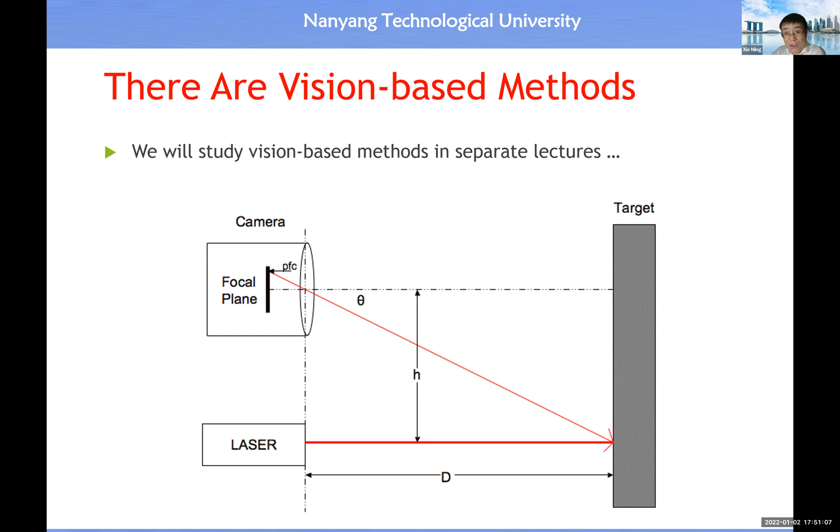That's all for today's lecture. The key takeaway is for you to understand the application with the information about position, and also the basic detail related to the definition of position. We have also studied the way for us to do indirect measurement of position, and two principles which will guide you to come out with the design solution of your own measurement and sensing system for position.